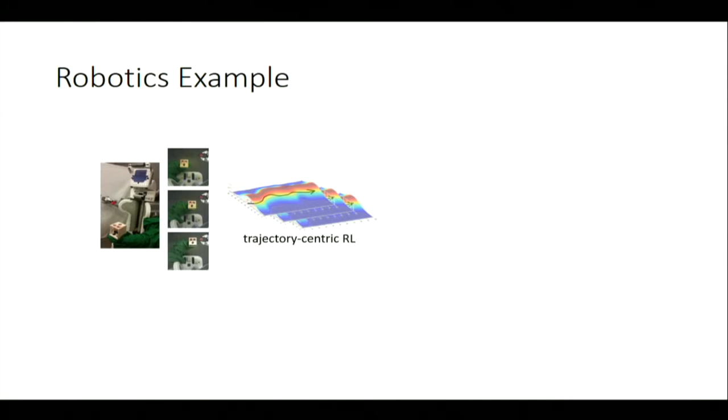But then we'll unify that into a single policy so it can deal with all these different positions and generalize to new ones. So we have a collection of trajectories that we're building here, and this is kind of what the process looks like.

Remember, it's using fitted local linear models, so it needs to keep making rollouts to estimate the local dynamics, and that's what it's doing in this video. Then all that data is combined to train a single global policy.

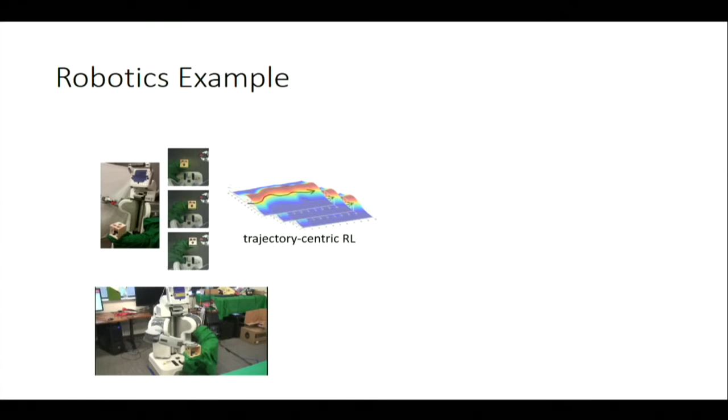And of course, we have to enforce the constraint, so we have to iterate this process: train our policy in step 2, increment some dual variables in step 3, then come back and update our trajectories in step 1. As we go around in this loop, the constraint is enforced more and more.

There's a question: in these examples, you have to define your trajectory before you actually handle the problem, right? So in this robotics case, you have to make the model of what the robot's supposed to do, correct? So the question is, you have to define your trajectory in advance, you have to make a model of what the robot is supposed to do.

Good question. You have to define a cost function, and the trajectory is constructed to minimize that cost function. The cost function in this little example is just the distance between where the shape currently is and where it needs to go. But you need some way to evaluate that cost function.

And that's actually a very important point, coming back to something I mentioned in the first optimal control lecture: you need some way to evaluate your reward function. Sometimes in real-world robotics cases or other cyber-physical systems, that can be highly non-trivial. So we're assuming you have some way to get your cost.

Later on in the class, Chelsea will talk about inverse reinforcement learning and some other ways that we can get a cost function if we don't know it.

You might wonder why we go through all this trouble. The benefit of building this comes back to some of the stuff I mentioned at the beginning of the lecture, which is that you can get good generalization. For example, you could generalize to new situations where the block is in an unknown position, maybe the robot is not holding it anymore, and so on.

There's a question: in that example, is the local linear model in pixel space? No, that's actually what I was about to talk about.

Yes, trajectory optimization requires you to have a notion of state. And the state here is the position of the arm, of the object, and so on. So the trajectory optimization is not being done on the images, it's just done on the known state of the system. This is actually one of the things this method is exploiting in order to work well. So this is the problem that I wrote down before for you.

You notice that there's no observations in here at all. Everything here is using the state, because you need the state to evaluate the cost and to build your controller. LQR requires knowing the state.

So this is all assuming you have the state of the system. If you remember from the imitation learning lecture, the distinction between states and observations is that states satisfy the Markov property, while observations in general do not. If you have an image of the scene, that doesn't necessarily satisfy the Markov property—if your arm occludes some object, you may not actually be able to tell where it is. The observations are not Markovian, but the state is.

So this is all in terms of the state. However, the policy pi theta doesn't have to be in terms of the state—it can be in terms of the observation. Observations in general are assumed to be some function of x, so it's okay to replace x with some function of x here, because you can say this is part of my policy. The way my policy works is it looks at the state, converts that state into an observation, and then processes the observation. It just so happens you don't know the function that converts state into observation, but it's still in there. So you can replace this x with an O and everything is still good, but this is still an x. So what this is really saying is: optimize your trajectories in state space, but then train your policy so that it can reproduce the behavior of those trajectories only from the observations.

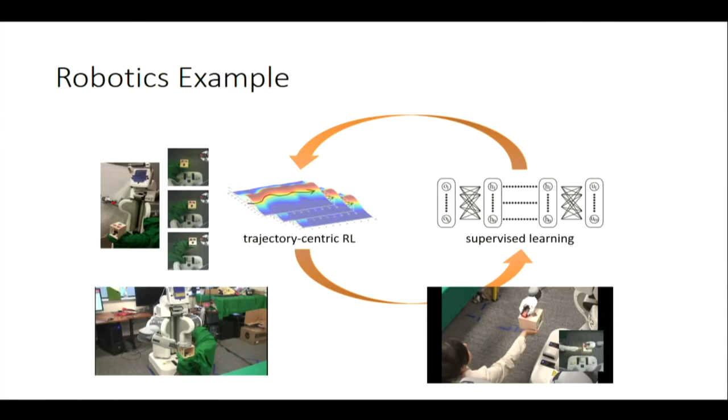So one instantiation of this input remapping trick is that at training time you have the full state, which you use to do your trajectory optimization. But for the policy, you only give it the observations, so that at test time you can perform the task using only observations. This will come up again in another method I'll discuss later in the lecture. So this is a pretty neat idea when you imitate optimal control.

Question: in your state, do you only consider position, or also velocity and acceleration? For this task, the full state is actually the joint angles of the arm, the position of the end effector, and their time derivatives—so the velocities.

Okay, so does anybody have any questions about this concept?

Question: does the position where you want to end up also enter into your observation, or does it only reflect the cost? You can do it either way—in these experiments it only enters into the cost. Because after you feed the policy that takes in the observation, it has a notion of which of the different tasks it's doing, right? Yeah, of course. For this example, the task is always to put something into the hole there. But if you have a more parameterized setting where your system might be asked to do many different things, then yeah, you need to somehow tell it that. In general, the algorithm itself is well defined regardless of what O is—O might even be completely empty. It's just that you won't be able to do very well at the task in that case, but under reasonable convexity assumptions it should still do the right thing as well as it can under that parameterization. Of course, in practice you have local optima and so on.

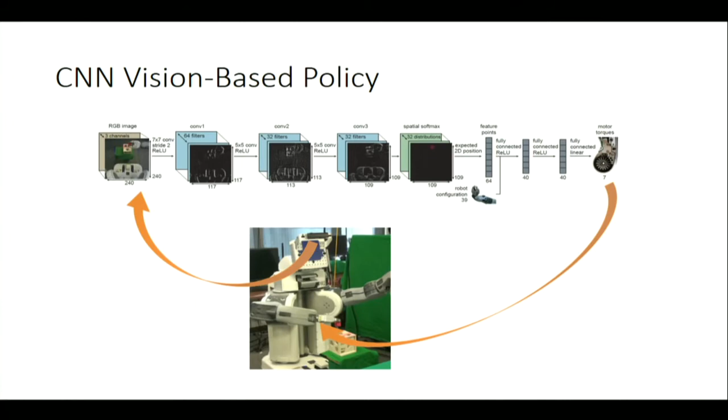So this is a generic kind of convolutional neural network type policy, and we'll see more of these again and again in the course. This is a little case study of this method applied to a robotic system, a paper we had on this, and I mainly want to show you some videos and point to some of the neat stuff going on. Let's see if this video will play.

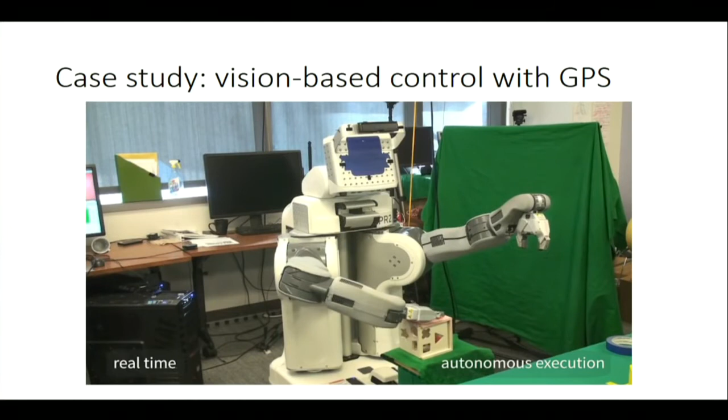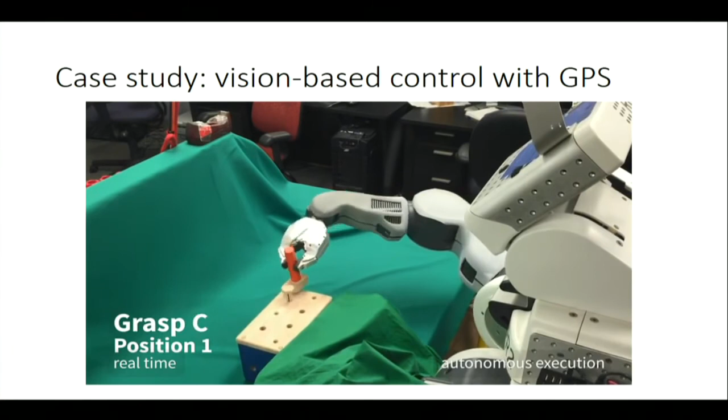So this is the task I described, and this is actually just test time, using the vision-based policy. This is another task where the robot has to hang a coat hanger on a rack at different distances from the robot. This task requires the robot to watch its own gripper, since the angle of the hanger it's holding changes, so it has to watch its own hand. And this one involves having to spin the cap to put it on the bottle.

After this—oh, I guess I don't have the videos with the first-person view here. Maybe I'll show them at the end of the lecture, but I also have some clips showing the first-person view of the robot. Anyway, some neat vision-based stuff.

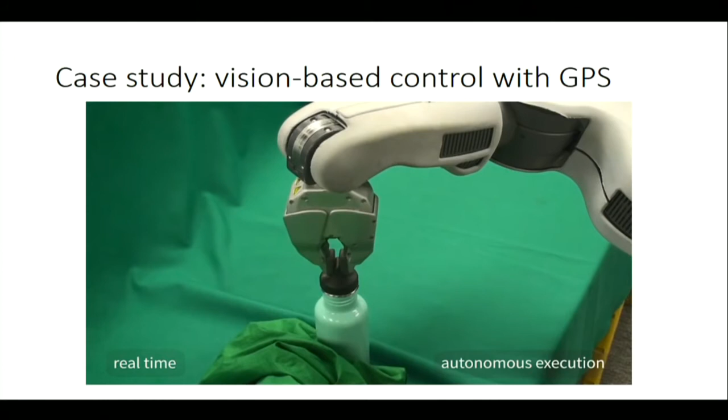Now, that was imitation learning where you have this optimal control in the loop with the policy optimization. You're actually modifying the trajectories or the trajectory distributions to best suit the policy optimization procedure.

Now, we could also take this idea and say, okay, we derived this imitation learning of optimal control starting from the model-based RL view. But it seems like imitating optimal control is a good idea in general—what if we use other imitation learning methods? That's a very reasonable way to go about this.

So for example, if we use Dagger, that's a pretty nice way to do imitation learning—pretty simple, and that's what you're actually doing for your homework. We could use Dagger just as well. We could say, let's do imitation learning with Dagger without having to do any of the surrogate objective stuff, and use our favorite planner if we have a discrete environment.

And that's in fact what was done in the paper I mentioned earlier in the class, where the idea is to learn to play Atari games without having to deal with the usual Q-learning stuff, and just use a model-based planner. In this work, they use Monte Carlo tree search, where the objective is just to play the Atari game successfully. So the planner is not adapting to the policy, and instead they deal with the distribution mismatch by using Dagger.

So that's a very sensible thing to do, and I'll mention at the end what the different trade-offs between these actually are. But before I get into that, let me present one more algorithm that deals with a particular issue that Dagger has. So using Dagger to do imitation learning for optimal control—quite a nice idea.

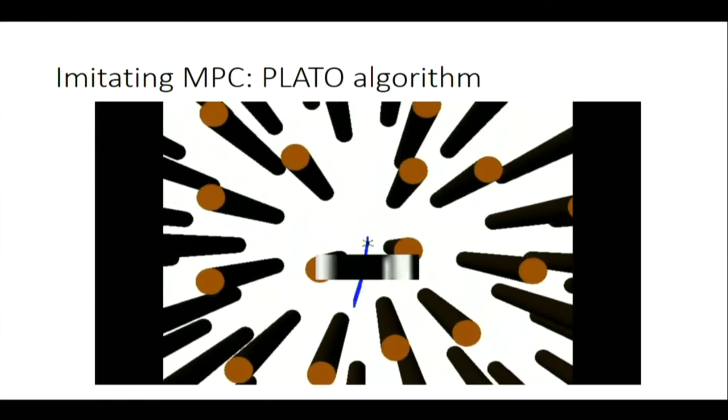Okay, so this is just another example of a situation where you can imitate optimal control, get a policy that can process whatever observations you want. The policy is trained with supervised learning, and then you actually modify the behavior of your optimal control teacher to provide, in this case, behaviors that are reasonably low cost at training time and conform a little bit to what your policy wants to do.

Okay, so let's discuss a few of the different trade-offs between the methods that we learned about.

So we talked about Dagger and guided policy search. The vanilla version of Dagger doesn't require an adaptive expert. In fact, the vanilla version of Dagger doesn't even care what your expert is, so long as the expert can provide labels for arbitrary states and observations. So any expert will do, so long as whatever states your learned policy visits can be labeled.

And the other thing is that Dagger does assume that it's possible to match the expert's behavior up to a bounded loss. And this point is actually quite important. Especially in partially observed domains, your expert might do things that your policy has no way of replicating. And we can come up with a pathological example of this.

Your policy can take anything as input. So if you just say, I'm going to kill all the input to my policy, so my policy doesn't get to see anything, it's just blind, then obviously you can't reproduce any kind of adaptive expert. So any expert that doesn't just take the same action or take actions randomly cannot be reproduced in that case. So in that case, the Dagger algorithm essentially wouldn't work.

So formally, the assumption is that when you run supervised learning, you should be able to achieve a bounded loss on your data set. Bounded loss means that there is something that you can learn from the expert, and you can bound how wrong you are, regardless of which states and actions the expert showed you. That's a very important assumption, which is oftentimes very reasonable, but you have to be careful, especially in partially observed domains, because sometimes it can be violated.